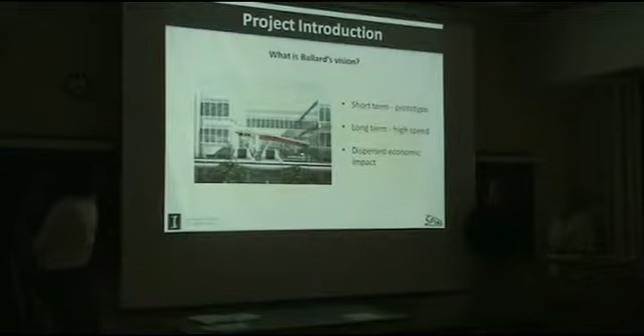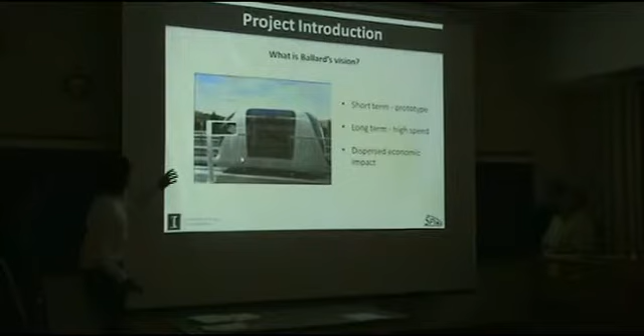What is Ballard's vision? A video would explain it better than I can, so we'll play this while I'm talking. The short-term vision for the personal mass transit system is to have U of I as a prototype for the system, very similar to what you see in this video. Instead of the cars being on top of the tracks, they'll be hanging from the track. Other than that, it's pretty much identical to this system.

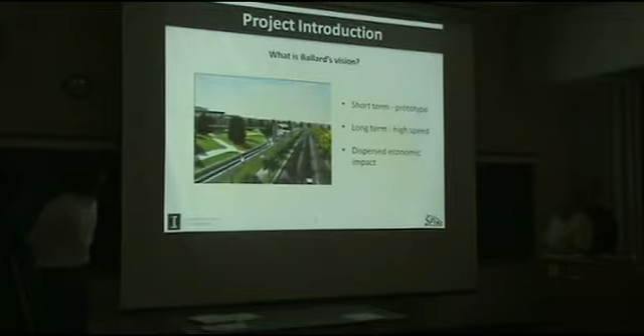This is actually the Ultra PRT system, which is in development and has already been used in a couple places, so it's a real working system even though this is a computer-generated rendering. Ballard's long-term vision is to have a high-speed system using many of the same principles, but connecting major destinations and cities across the country. It's a long-term vision though, so it would take a while to implement.

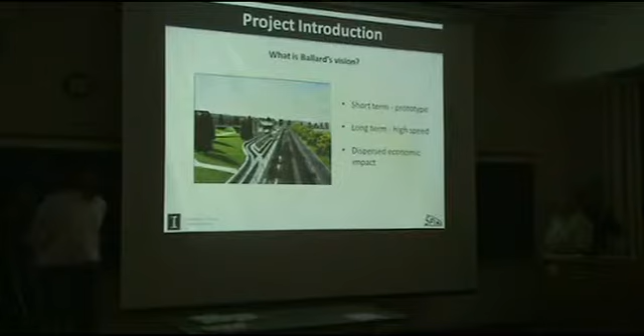The economic impact of this system would be dispersed. It would create jobs for the construction and operation of the system, promote the development of businesses, and has the possibility of bringing in revenue for city and state governments. So where do we come into this project?

We will be determining the steps for implementation, forming local partnerships with the cities of Champaign, Urbana, and the University of Illinois. We will be finding funding sources from the federal government, and by the end of the semester we will complete a funding proposal. So how exactly are we going to accomplish those goals?

We'll analyze transportation problems, which John will talk about in a minute, and research the PMT technology to determine whether it's feasible to have a system on campus. We'll establish context, gain support, and create partnerships, and analyze the feasibility of a PMT system. We'll conceptualize system implementation—for example, where these tracks would be located if they were on campus—research the funding process, prepare and submit a funding proposal, and analyze the potential economic impact of the system. With that, I'll pass it off to John.

All right, thank you, Lauren. From our discussions with various people from the University, Urbana, and Champaign, we found out these are their current and future concerns.

We found out they're trying to reduce traffic congestion and improve pedestrian safety and wellness. As a consequence, they're improving street conditions and adding more sidewalks. Also at night, they're improving lighting on the streets and adding more buses. They're also trying to improve handicap accessibility for transit systems—currently the buses have a kneeling feature so they can load handicapped passengers, and we're going to implement that in the PMT through elevators.

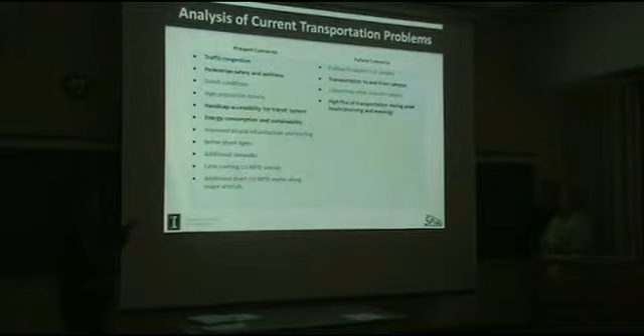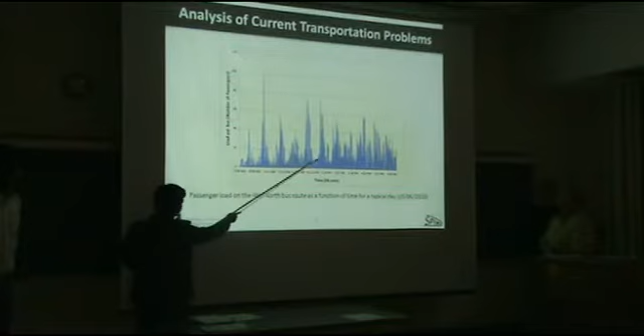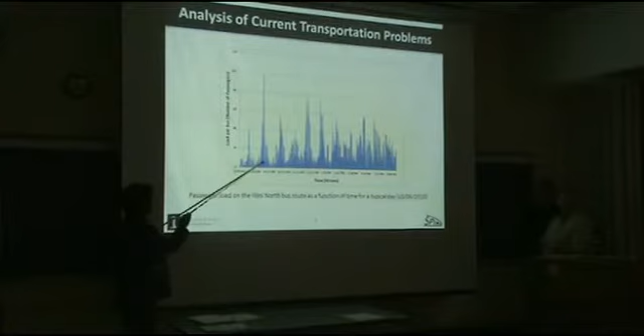As you can see in the following slide, there are a lot of passengers at 9 o'clock, and also in the middle of the day and at the end of the day. This is from MTD, the local bus service. Currently it usually takes 2 buses to load the passengers at 9 o'clock, so it's going to be more of a problem if the parking is moved outside of campus.

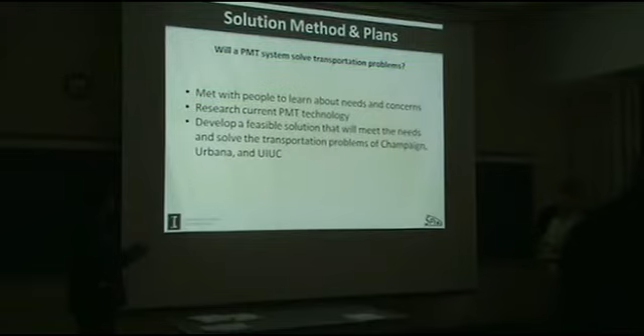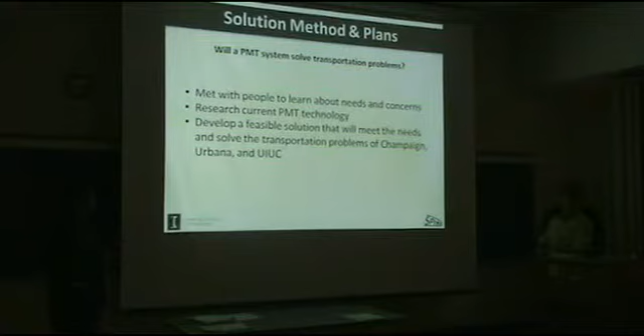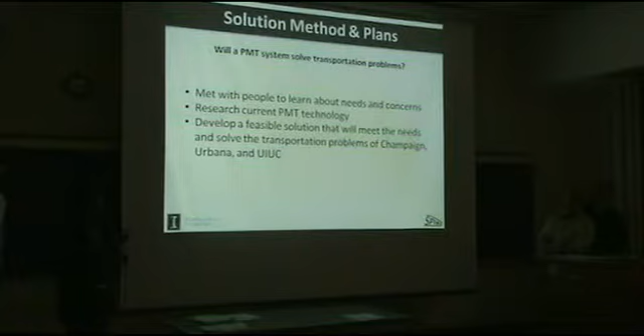So, will a PMT system solve the transportation problems? Well, to find out we met with various people, as mentioned in the previous slides, to find out their needs and concerns. We researched the current PMT technology currently in place in West Virginia, and also the one being built in Santa Cruz. We're also developing a PMT solution that will meet the needs and solve the transportation problems of the university and the two cities.

The concept promoting the PMT system came from a corridor study done a while back that analyzes the transportation along University Avenue between Champaign and Urbana. Our PMT system aims to connect the two cities through University Avenue. We also looked into the climate action plan signed last May, which aims for the university to be carbon neutral by 2050. Our system has zero carbon emissions, which coincides with that.

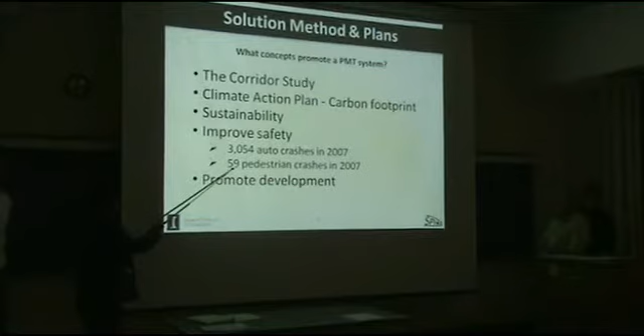Our system is pro-sustainability, and its overhead structure will improve safety and reduce crash numbers and pedestrian crashes. A fourth of these result in injuries, and 3 persons died from these pedestrian crashes, so we're trying to reduce that to improve safety of this system. We're also promoting development, because a transportation system like this would entice businesses to set up and promote growth.

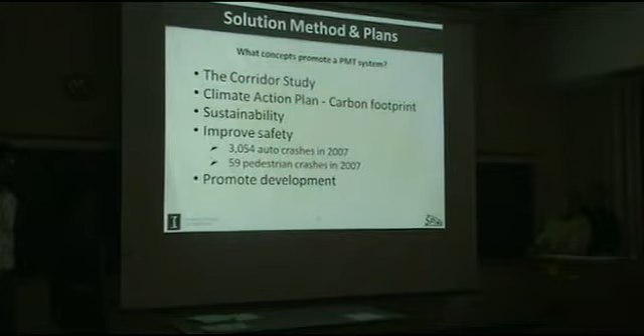And here's Jake to further discuss our solutions.

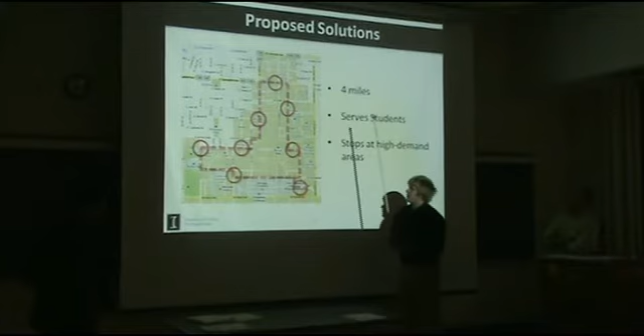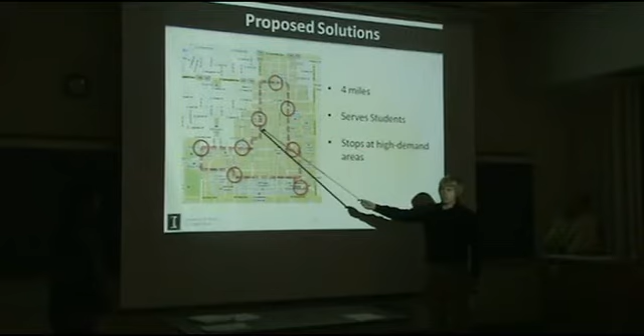As you can see here, here's one of our proposed routes. It's a basic campus loop, and our estimates make it out to be about 4 miles. It mostly serves students, being a campus loop, and as you can see, these circles represent some of the possible locations for stops, which would hit high-demand areas such as the residence halls, Memorial Stadium, by the bookstore here at Transit Plaza, which would transfer to different buses. Does it go beyond Kirby? Yeah.

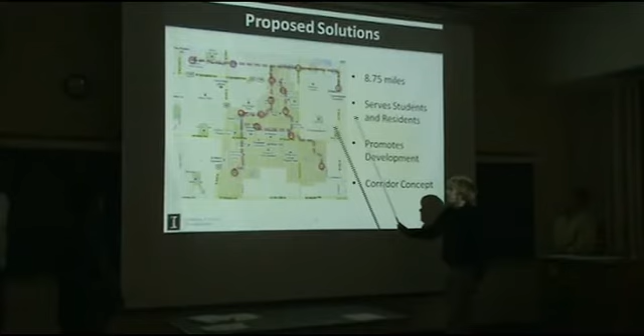This is another proposed solution we have, which would also branch out to other areas in the community. It would serve students as well as residents. Here is Orchard Downs, one of the locations suggested by Libby Tyler, the city planner of Urbana. She suggested having links like this to promote development, and as you can see, we go back to the two downtown areas. The other area she suggested was a route to Research Park, which was also suggested by some other people we met with. Finally, the connection down University Avenue would coincide directly with the corridor study done in 2007, connecting the two downtown areas.

So we did a cost analysis on these 3 system routes, as well as a 1 mile long track that could possibly be used in the future to connect outlying parking lots that would move to the outskirts of campus. To get our capital cost, as well as other estimates, we looked at similar systems such as the Morgantown PRT, as well as the Ultra PRT.

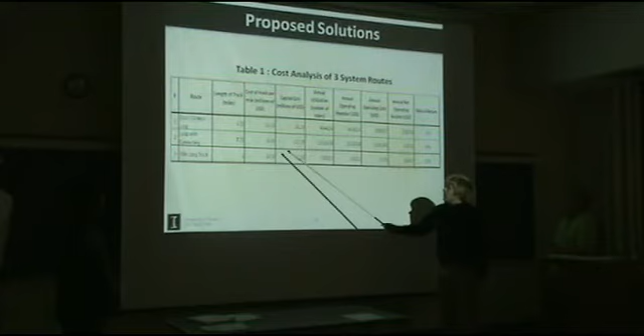To get our capital cost, we found an average cost of track length per mile and multiplied it by the track length we found for these estimates. To get our annual utilization, we looked at utilizations of existing systems and utilization predictions from other studies, and scaled that by population. To make sure these numbers worked right, we took a certain percentage of the MTD's utilization, just to make sure these were reasonable estimates.

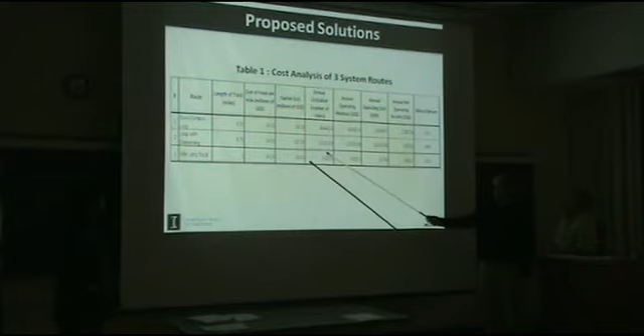To get our annual operating revenue, we set a cap at $1 per ride, which is what MTD costs. From that, we also got our annual operating cost, converting the operating costs of similar systems into cost per passenger mile, then multiplying that by our track length and utilization. From that, we were able to get our annual operating income as well as the rate of return. As you can see, our income is positive, but unfortunately the rate of return turned out to be negative.

We would need to get some sort of funding to cover these capital costs in order to make this a worthwhile project. As you can see from our first analysis, the basic campus loop has the best rate of return overall. So not only do we have to worry about the economic feasibility of systems such as these.

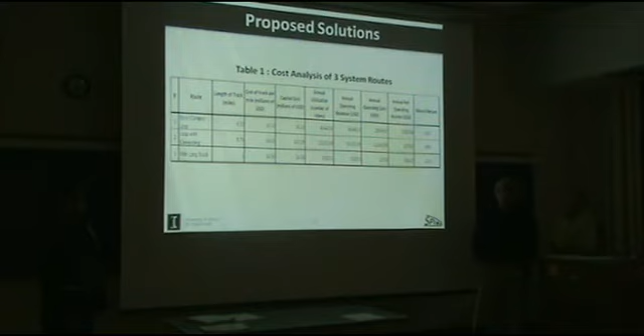One slide. Yes, so that assumes $1 per traveler, is it? Yes. And you try to see how sensitive that is to increase. So I imagine that you could... We could change it, yes. Have you guys seen how... We just set it at $1 to coincide with MTD's. We could lower it, but I don't think we could go over it. Does that, I mean, the MTD is, you know, all the students and such, right? And they make the contract with the local. Yeah, right.